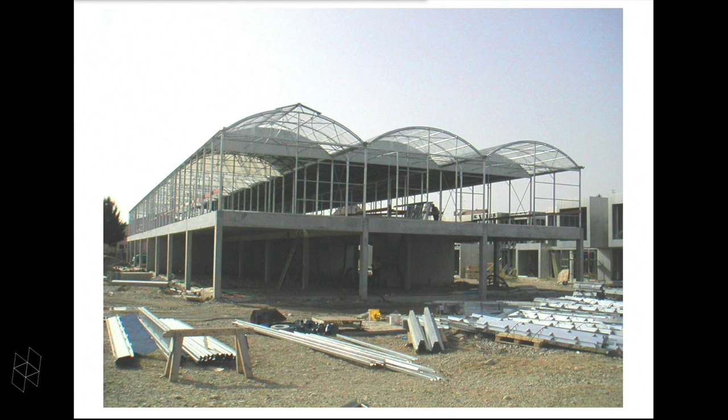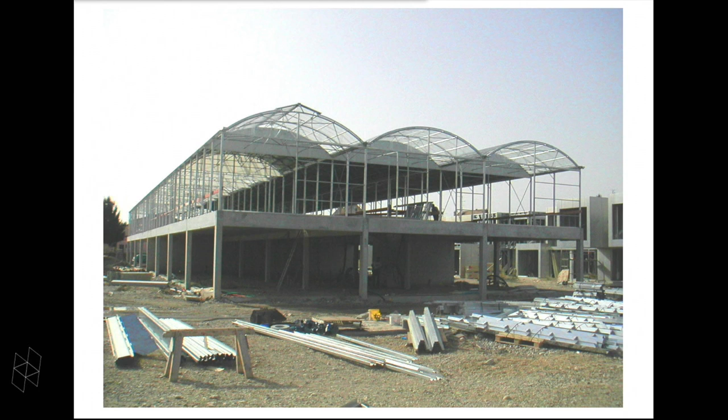It is possible just to superimpose two systems, two completely different systems. One is a very efficient structural system of concrete with columns, beams, and floors. On top of it, a professional horticultural greenhouse with all its equipment for creating climate. So capacity given by the concrete system, controlling the climate with the professional greenhouse system, and by combining the two, the possibility to create flats and apartments there.

With, here again, double space. Double space meaning the program of a house with 2 bedrooms, 1 living room, 1 bathroom, and 1 kitchen should not be restricted to this dimension, but should have more free space, in order to expand other possibilities: to invite friends, to have many other occupations, to allow for some surprises of life, and to let people expand their wishes and their character.

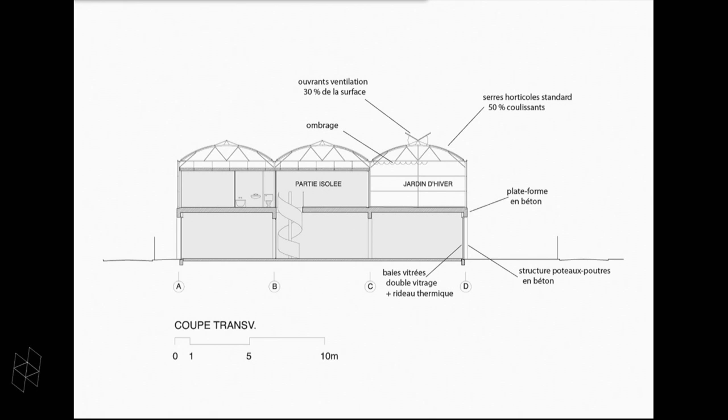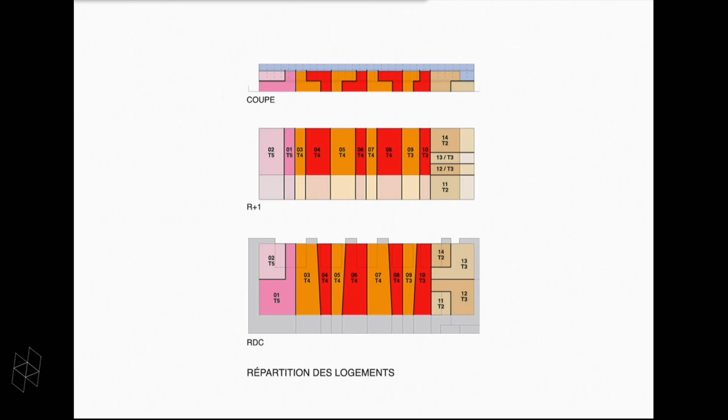So just this system allows these two places, and then you see how you can make a partition of it, giving each apartment access to the ground floor, the upper floor, and the facade, in order to produce, with the same budget as a flat of 80 square meters, a flat that is 180 square meters. And that gives these possibilities of life.

Different possibilities of use, perhaps placing in the winter gardens things that, as architects, we would never think would be there - but being confident with the user and the inhabitant to use this capacity.

Always this relation between inside and outside, this transparency, this possibility to filter, to reduce the light if you need, but all the time to have the maximum possible.

Double space, not only for housing, but housing is everywhere. Housing is here, housing is in the school, housing is in the city. Inhabiting is situations to be well in any place of the city. For us, it is this idea that today inhabiting becomes the most challenging objective for architects and urban planners in order to make the city comfortable and full of pleasures.

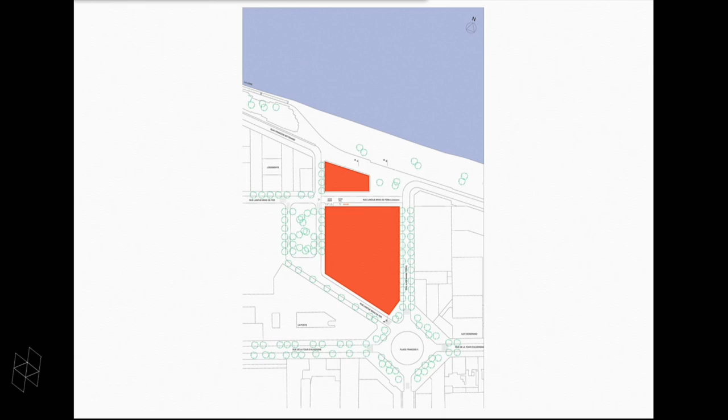So to take all the parcel, all the plot, to occupy all the plot. And then on this plot to install a system of very high capacity, perhaps like an old industrial building that could have been there on the harbor of Nantes before, but that is no more here.

So a system of a grid of 10 meters by 10 meters, supporting floors of a capacity of 1 ton per square meter. The first main floor is at 9 meters high, the second at 16 meters high, and the third, which is a roof, is at 23 meters high. All of them have this capacity of 1 ton per square meter.

And then a ramp, a large ramp of 8 meters wide, like a street, takes the people or the cars or the vehicles from the ground floor and takes them to 9 meters, 16 meters, and then 23 meters, giving access.

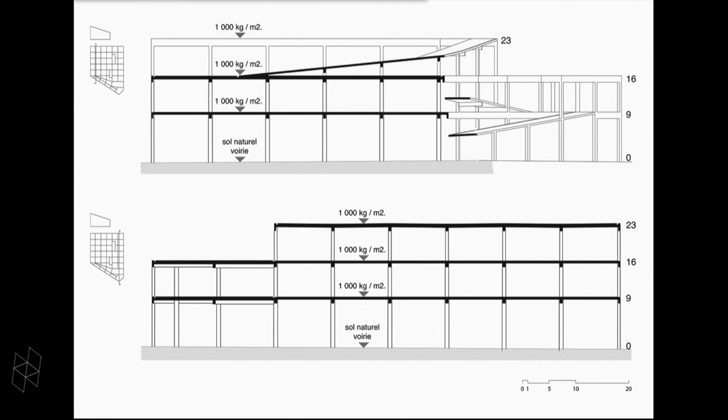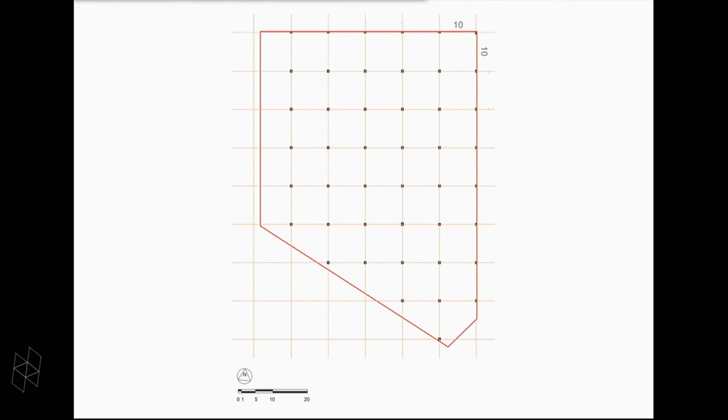The grid is the tool for the economy, the tool for efficiency, the tool for robustness. Some stairs and elevators, and the start of the ramp that develops from ground to the next levels, make a sort of promenade from the ground floor of the city of Nantes to a sort of terrace 23 meters higher.

Opening possibilities. All the floors in the School of Nantes make a total addition of 30,000 square meters when the program is 9,000 square meters. And the budget was about 9,000 square meters.

But the idea was to keep on the budget, to stay in the budget, and to propose these 30,000 square meters of capacity and possibilities for the school.

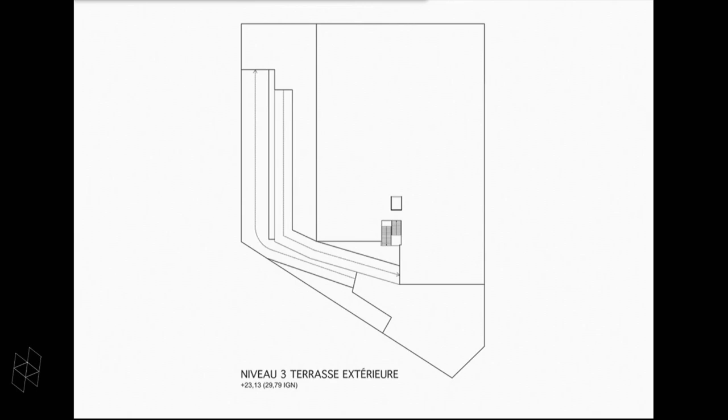So a sort of huge space with huge heights where there could have been a building before, in which the School of Architecture could install itself.

A skeleton made with the minimum of concrete, but at the same time with the maximum of robustness and the maximum of heights, in order to achieve the possibility for different programs to install in it.

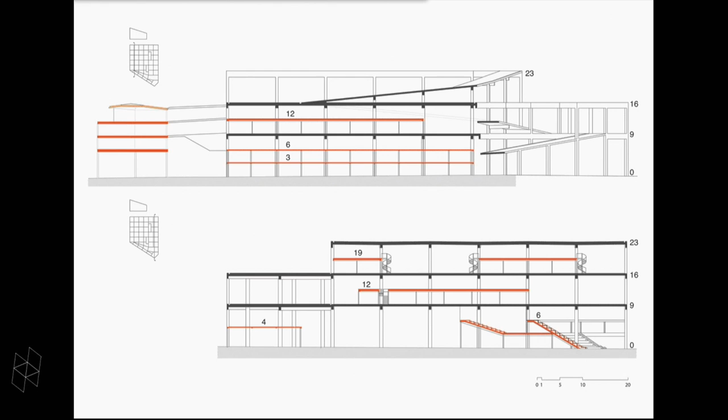So then, inside this main structure, a secondary structure takes its support from each of the main floors, allowing for mezzanines and amphitheaters, in order to install the program of the School of Architecture in this sort of loft, with places for mezzanines and different occupations depending on the levels.

And then inside the system, to think of different climates. You have a green climate, which is the climate of the program, something you have in all schools of the standard, with a regular temperature.

And the blue one is a sort of intermediate climate between the climate outside and the resulting climate in the green, also using the passive energy of the sun, which makes this space totally usable even if it is not at the right temperature all year. And to propose different capacities and different kinds of space and climate.

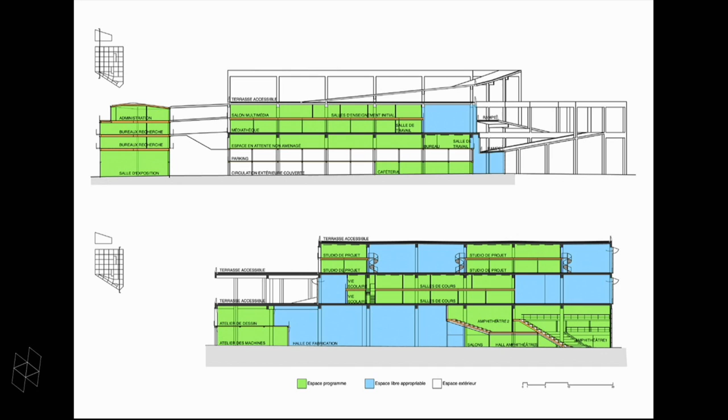Then, inside the system, the project develops, the ramps develop, organizing the connections with all the main situations. The auditorium opens to the street in order to have this interaction between inside and outside.

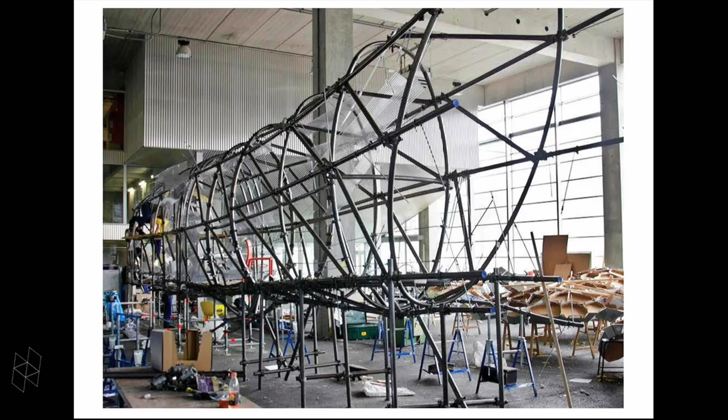The cafeteria occupies the ground floor. The 9 meter volume gives the possibility for making huge models for the students, always with this relation inside-outside, trying to open different possibilities: to have a concert, to have this auditorium open to the river and the outside for different presentations or theater elements.

Trying to work all the time with this porosity between what is inside and what is outside. But also giving the possibility of little meetings, where one professor can go to a corner, just at the view of the river and the city, and make a little speech with his students.

Giving the possibility to go where the sun is, or to use the additional space for performance and events.

Always this relation inside to outside with sliding doors opening to a little balcony. And this possibility of views to be in your studio working on the models, looking to some friends on the level below, and then further on the bridge and the river and the city. Transparency, visibility, porosity, mixing of climates, mixing of possibilities.

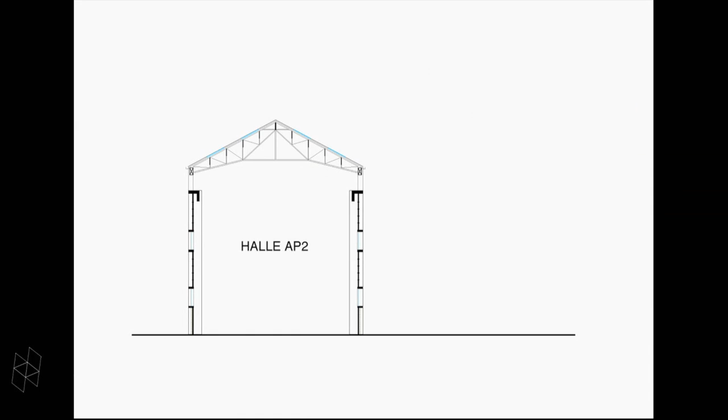And for us, it was strange to imagine a competition where people ask you to fill this with a new architecture, with new floors inside. So instead of working inside this big hall, we make a double building. We install exactly the same building just on the side of the first one, and we put the program on the new one, in order to keep the first one totally empty.

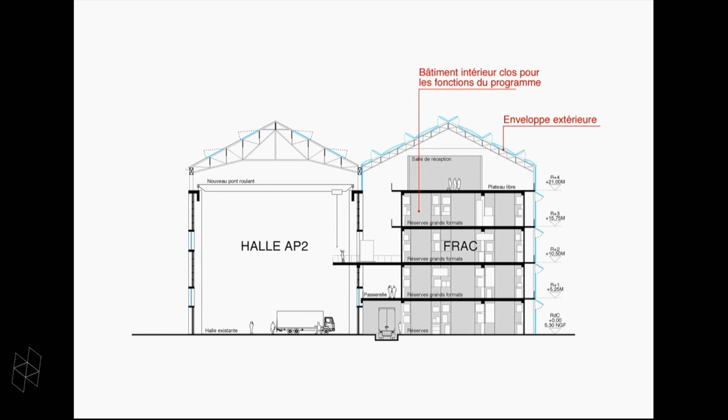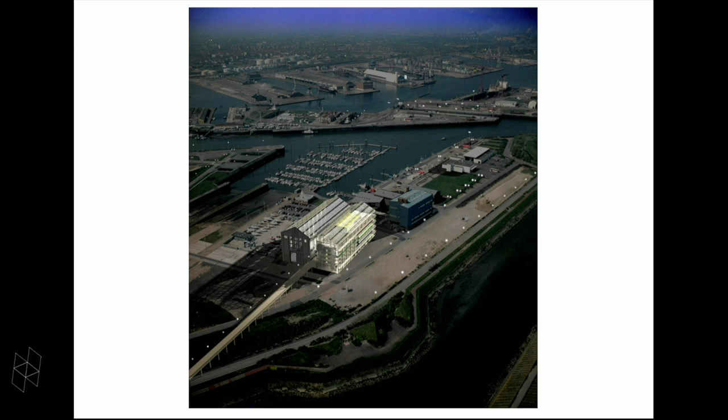With the new one, transparent, with the storage and the exhibition rooms, instead of filling the building, we say no, there is no nostalgia, there is no memory. The question is ambition. Ambition is to double and to have two times more possibilities.

It was more simple to work outside than inside. It was more economic to work outside than inside. And it offers two times more volume. And it keeps, I think, what is the most important, this inside space free as it is, with this real memory of what happened inside before.

So, building double in the same budget with this careful attention to economy in order to give more possibilities and more freedom. So now it's open, it's an art center with the use of the first original building, the cathedral, and new equipment like the entrance hall and the cafe, opening to the exhibition room in the new building.

A new building that is totally different, because the first one is quite opaque, this one is totally transparent and open to the sea around and to the harbor around. When from the first one you are surprised by this huge volume, here you have a system of stairs and elevators that makes you go very high in order to have the views and the panorama all around you.

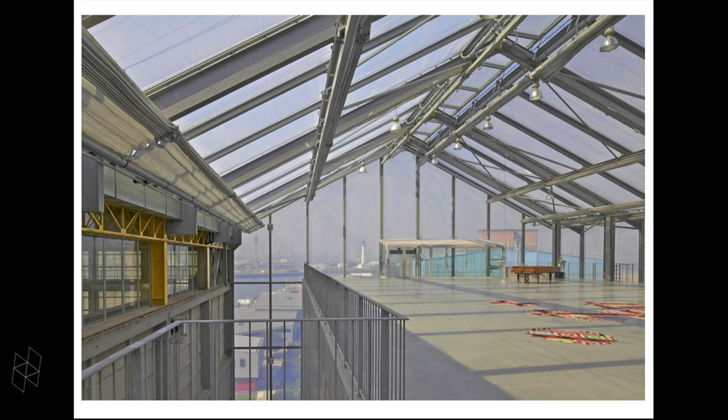So huge spaces with the collection of art, different possibilities to exhibit with always these views and balconies to the sea. Here the view on the Manche. Here's a view on the harbor. Views that you never had before, like looking from up to down to the first big building. Building double.

This seemed an interesting challenge for us, in order to give the program more freedom and no restriction. Another point Anne was talking about is precision, precision and delicacy, which connects with this African lesson that we had, to do with whatever in any circumstances.

When you are close to the sea, in a forest, on a parcel with plenty of beautiful pine trees, the question is whether a house is possible. It is possible to inhabit here, but to keep the site exactly as it is, meaning never cutting a tree, never taking away a root, and using the sand dune with the exact shape it has, being extremely precise to install a house that participates in this context.

Even the light - normally it should be dark to go under a house - but it is possible to use the reflection of the sun on the sea, so this reflection comes from down to up, reflecting on the aluminum of the ceiling and making this beautiful light underneath.

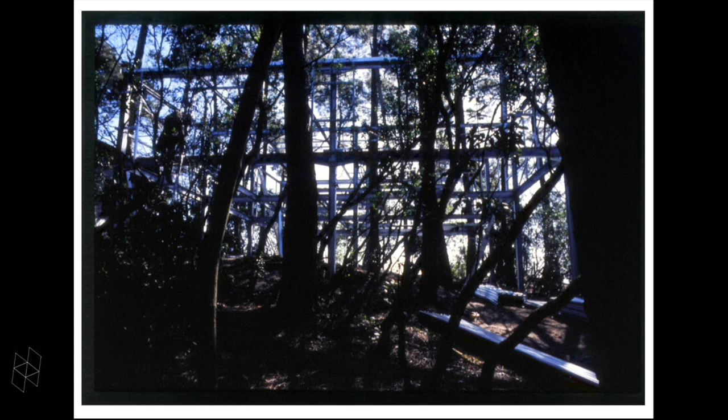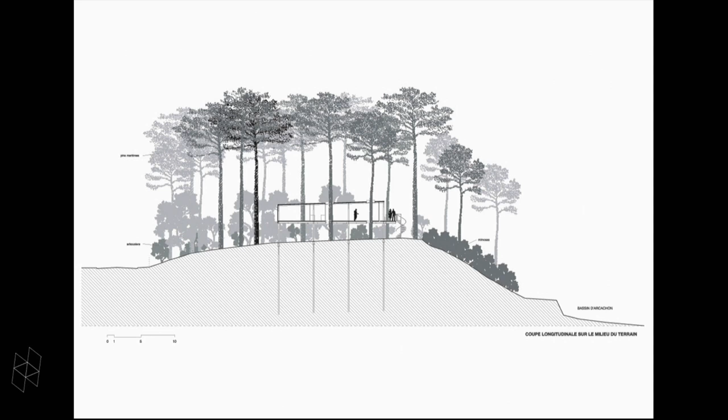So it's about thinking very precisely how to mix two systems: the existing systems of the trees, the forest, the roots that are particularly fragile, and a steel structure that could go inside to give the conditions to install a family here. With very precise foundations and a system of pilotis, the house is quite high over the sand dune, opening the view over the little bushes toward the sea.

So all the trees marked by the black dots are all still there - 50 at the beginning of the construction, 50 at the end. It was clear that if we said 'this one, we should cut it,' then the challenge was no more there, there was no more excitement to do the project. No, we had to keep all of them.

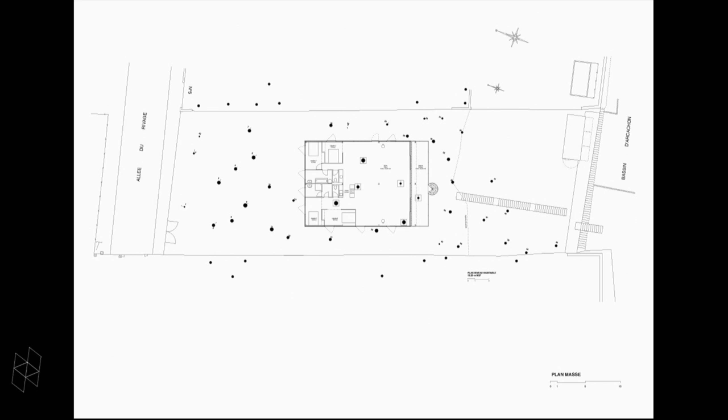Even this one that is in the passage between the toilets and the bathroom, and that is a bit too big - it's okay, we have to do with this. And to manage all the questions, like how it moves when there is wind, how it doesn't touch the structure, because it's so strong it could damage the house.

And finally, the main thing is to install a situation - to rest there in the shadow, close to the trees, to touch the trees in your house, and to have this view towards the Bassin d'Arcachon.

So, to do with the minimum. Here, the house was already there - it's like 80% is already there with the trees, the sand dunes, the panorama, the view, the landscape. As an architect you just have to add some elements of steel, some concrete, some transparent windows, and that's all. Doing with, and with the minimum, and this very precise, delicate attention to all that exists.

So this is the kind of project we're sometimes on today - like this, what they call an ecological cluster neighborhood. On this parcel, the question was whether it's possible to build 500 flats at the limit of this forest, a natural forest in the city of Saint-Nazaire that had been there all the time.

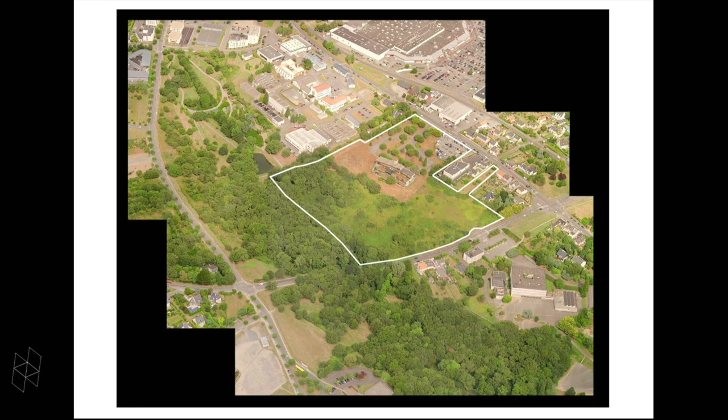It was clear that placing 500 flats there would destroy the site - how to protect the ground, how to protect the soil. So the first element of research we did was to study the forest, its different areas, different qualities, different parts, different density of forest, to see what kind of site we had.

And to see the danger of building there. We even found a whole building that the client didn't even know was still there - an old office building that we found very interesting.

And immediately we said we should not demolish it. We wrote to the mayor in order to keep it, and he said no, it's too late - even though it was delivering some beautiful views on this situation.

So the question was, like in the first project, to see how it was possible to raise over - to make this building on very long pilotis, with a passerelle at 9 meters high from the ground, and then the first flat 3 meters higher at 12 meters high from the ground, on three levels, with stairs coming from the pedestrian way to distribute the system.

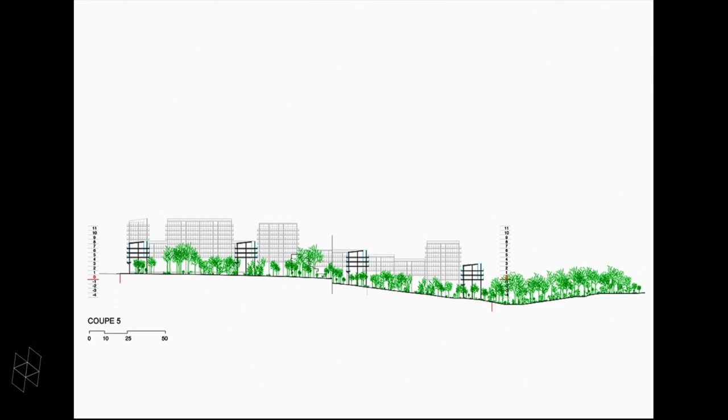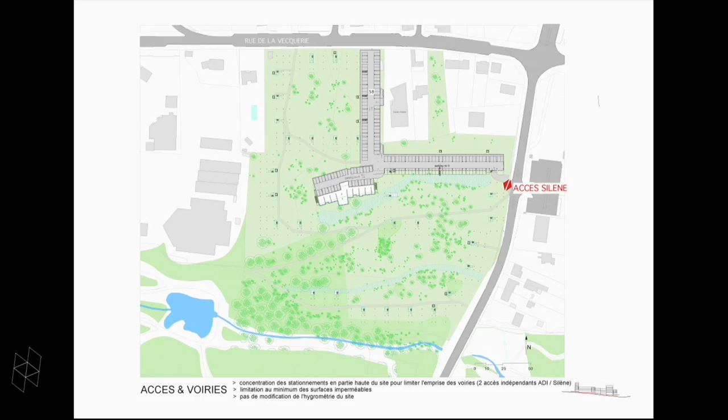So we don't see the pilotis and the stairs nearly, but there's minimum impact on the ground, then the passerelle of distribution at 9 meters high, and then the flats at levels 12, 15, and 18 meters.

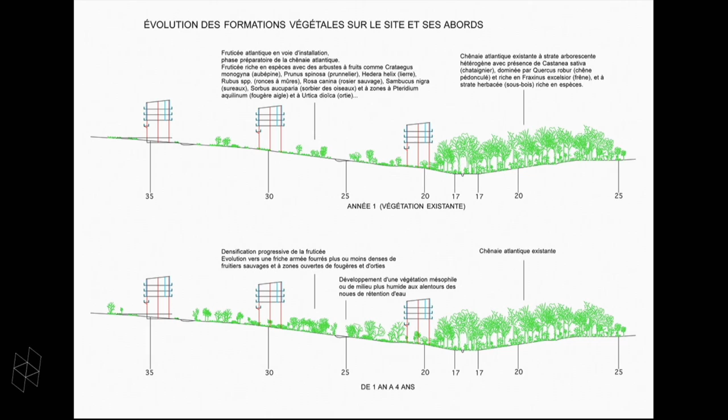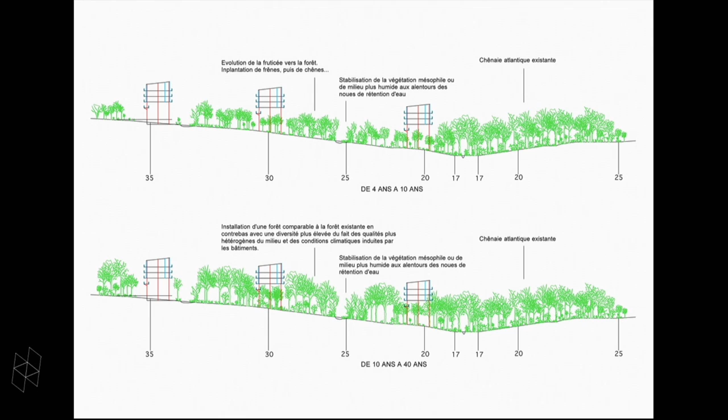And then, year after year, this possibility for the trees to recover the situation and to install vegetation even under the buildings. So we can see here from 4 years to 10 years, and then from 10 years to 40 years, the forest could take the place again in direction of the city.

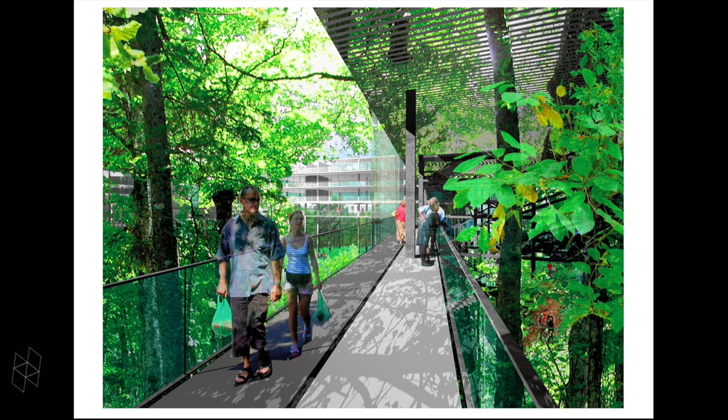So the pathways are only pedestrian. We use this transparency and this reflection on the materials, and we try to work a maximum with the light in order to push the vegetation.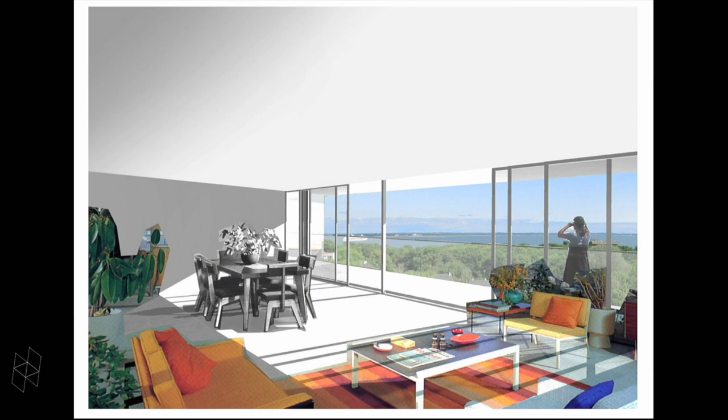And at the same time, installing some flats in a fantastic situation. So here the challenge is this: to propose a system, but at the same time to propose a participation for the inhabitants to something that is just below where they are living. They can be responsible for the re-attractivity of a territory, or they can be responsible in terms of inhabitants for the recovery of the forest in an urban area, and how they can participate in this challenge.

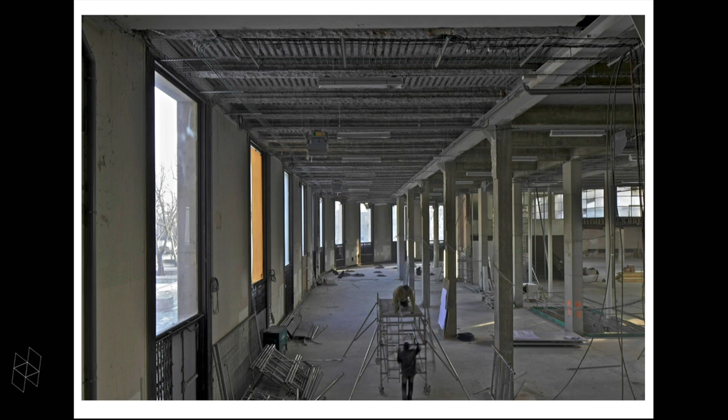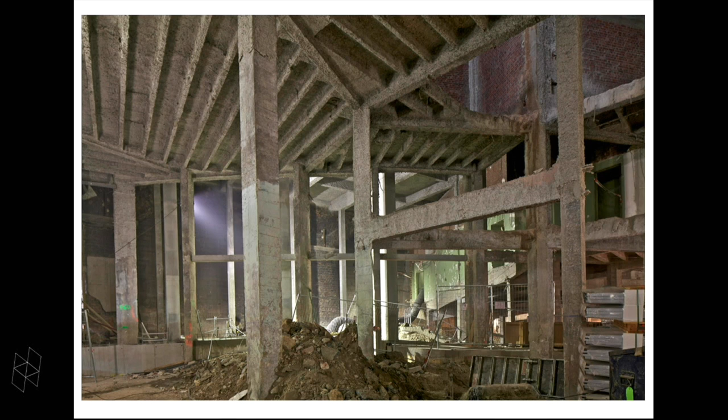Or to do nearly nothing, like this big Palais de Tokyo in Paris, where the structure was empty because of a former demolition project inside that never happened, and this building stayed empty for 2 or 3 years. We wanted to see how it was possible to make the life again, to make the space free again, and to install a contemporary art center in it, with a minimum budget, taking advantage of the quality and the extreme strange character of these spaces in order to fulfill the wishes of artists and visitors.

So, nearly nothing, just giving the minimum for heating, for lighting, leaving the spaces like they are, just working on the solidity in order to repair the building with a minimum budget, and stop.

No. I have a block. Is it okay? It stops, so I don't know what happens.

Yeah, it's come back. So to see in this incredible space how immediately plenty of artists organize different art pieces, freedom again for visitors. This Palais de Tokyo has been open since 2002, and each year 800,000 visitors come to explore the building.

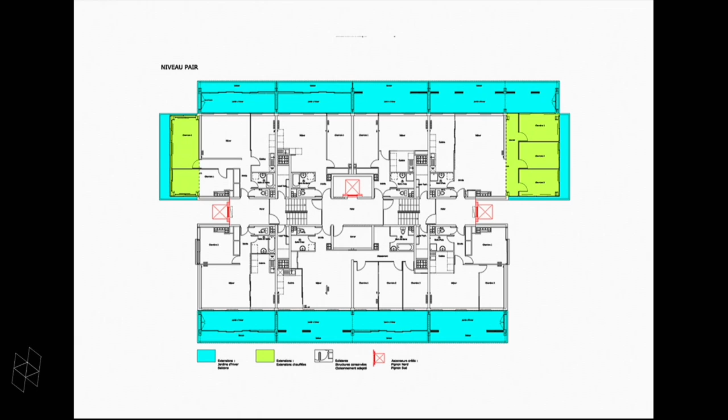It's in that way that we transformed the Tour Bois-le-Prêtre in Paris. That was a building built in the 60s, unfortunately damaged in the 80s with these asbestos panels of beautiful pink and red, with fewer windows than before. We worked on an extension with new rooms and new winter gardens, new elevators, in order, instead of demolishing, to add and propose new possibilities.

So instead of that view, to have new winter gardens in addition, and then all this transformation from inside inevitably changes the aspect and the view from outside. People stayed during the works, all of them, and just gained this extension of their flat.

In the same principle, another city close to Saint-Nazaire, in La Chênaie, these very characteristic blocks around the cities in France, and always this question: should we demolish or should we keep? Here we have a little tower with 10 levels and 40 flats, and we looked at the possibility to extend.

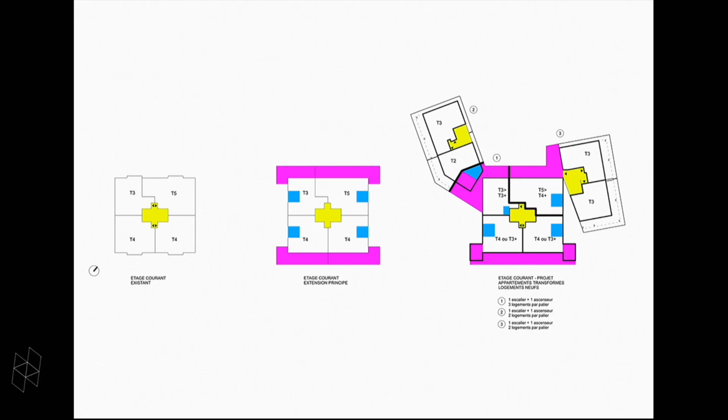We went from this situation to this situation, to have new bathrooms here that were here before and bring them here, to have new balconies and winter gardens for all 4 flats at each level. At the same time, thinking about density, it's possible to add 40 new flats in 2 wings, using the hall to distribute some flats here also with particular entrances.

So we see how by addition, instead of demolition, we can change the situation. Densification, in order to give more place for each, each has a much bigger flat. The budget is much lower than the budget of demolition and reconstruction. And at the same time, more densification, more population, makes possible some new shops, new equipment, new services on the territory.

At the same time, this same kind of situation with winter gardens saves energy in a different way than triple glass - it's better if you can have some life between two glass layers. Always balconies, filters, the possibility for the inhabitant to characterize his climate and ambience with curtains, with the winter garden movement, and these views on the landscape and territory.

Today, I'll present this project very quickly, but it works because we worked on this element, this building, and this little building. It is 530 flats, all occupied - there is only 1 or 2% unoccupancy.

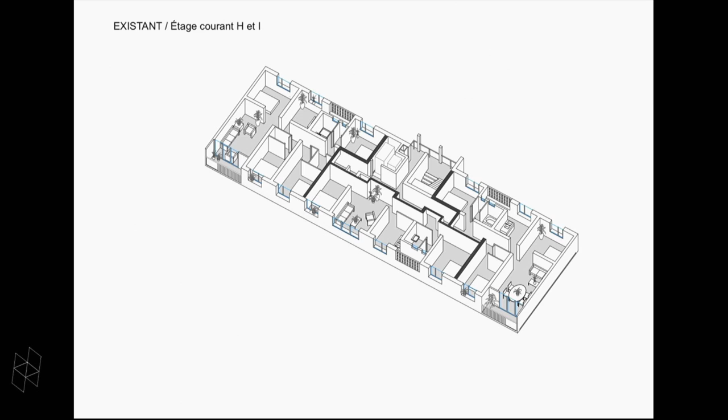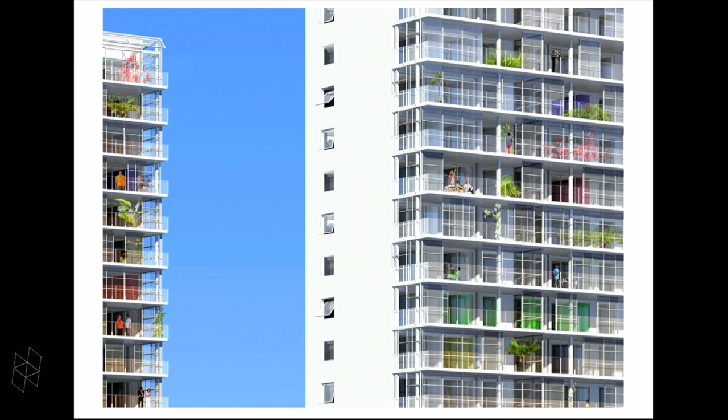From this window to give this possibility. From this kitchen to open, to go outside. And then from this situation, for each flat, to give this possibility.

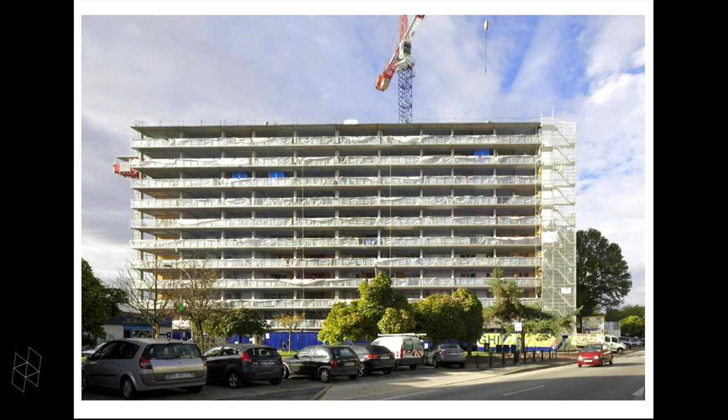So then very quickly, the story. Here you see the first elements of foundations. Then the elements come, already prefabricated, with all the elements for the rails, for the balcony also already there. And then the change progressively - 8 elements by day, so this can go quite fast.

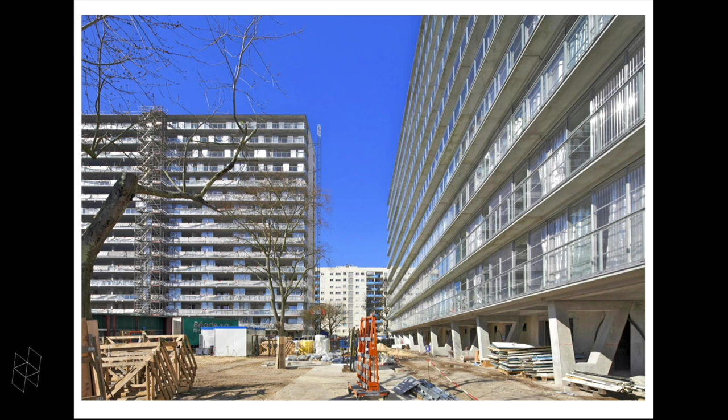So a lot of work still, but already this is done - we have already this. And we change this very flat facade in order to give this extension to outside, to extend the program - it's not only living room, bedrooms, bathroom, no, it's also additional space, like a garden. So at the end, the challenge is that we should have no more flats, we should have only villas everywhere.

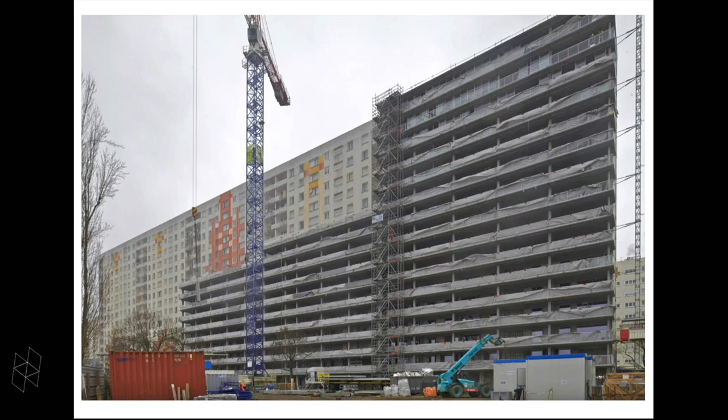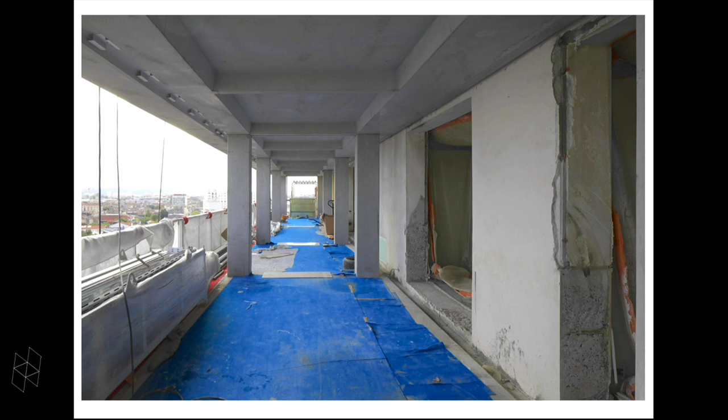So you can see here the system and the process with these prefabricated elements that have their definitive balcony. Then they open under the windows, they cut under the windows - you see here - and then they place the new windows.

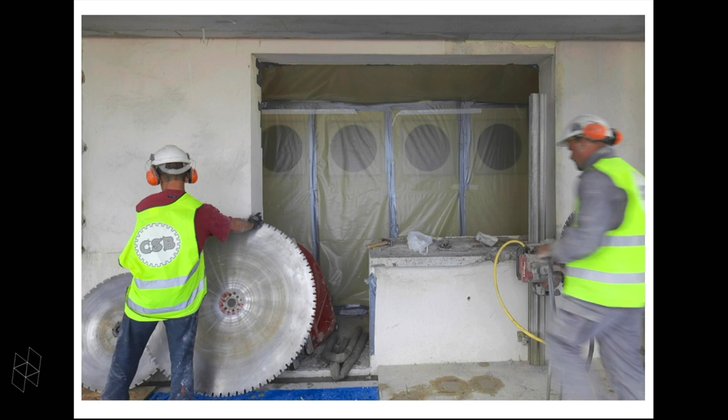And this situation - then we have also some asbestos to protect, so people can stay inside, and we have this protection in order to avoid pollution. With the elements to cut the walls, take them away, then open again, place the window, and open to the winter garden.

In Mulhouse, another project, social housing, with this same generosity of space, with this same careful attention to the economy, the budget, with the challenge of generosity of space.

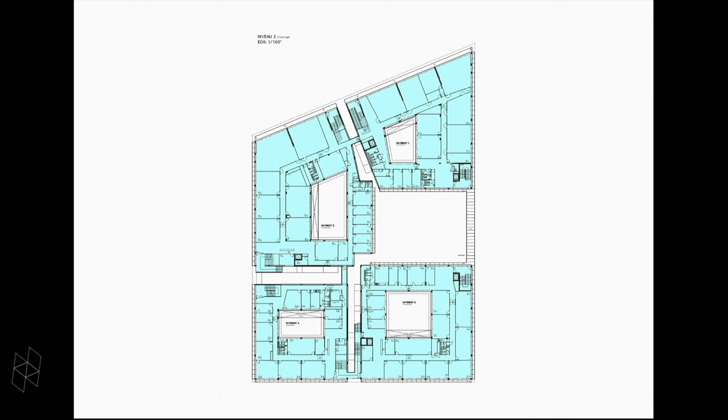Or in Bordeaux, it is just a very universitary building for management, so nothing really funny inside. So we wanted to add something on each facade, on the 5 levels, at each balcony, to create a sort of garden of rose trees - 650 climbing rose trees, with different names, all around this facade, to create a vertical garden full of flowers.

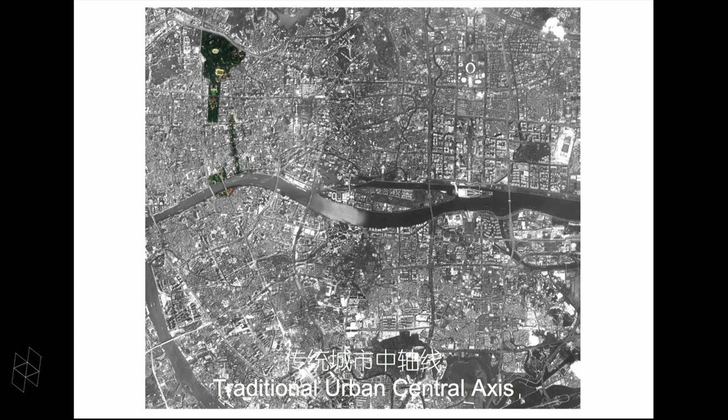Or sometimes, like this last competition in Guangzhou, for the Museum of the City of Guangzhou. The original museum is like this, a system of platforms. The reference is to the symbolic foundation of the city of Guangzhou: 5 goats that came when the city was a desert, and when the goats came, they spread seeds everywhere, and the city became extremely luxuriant.

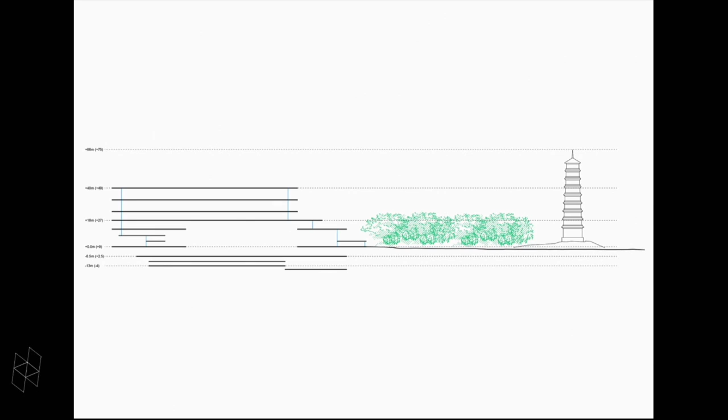So a new plan to make a project of museum inside this context, with this pagoda and this beautiful garden in this context of strange buildings, on this parcel here, to work on this situation. And there, also to install, like in Nantes, a very simple and efficient building, a sort of reference to the National Gallery of Mies van der Rohe in Berlin, a stratification of levels up to 40 meters high, keeping the forest and the pagoda, installing the building totally on the back in order to keep the trees free.

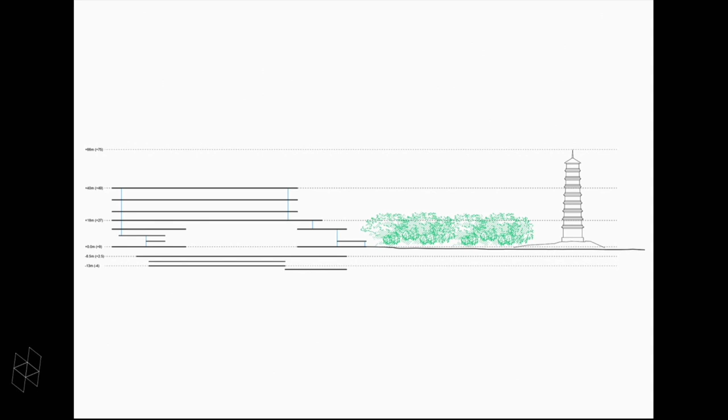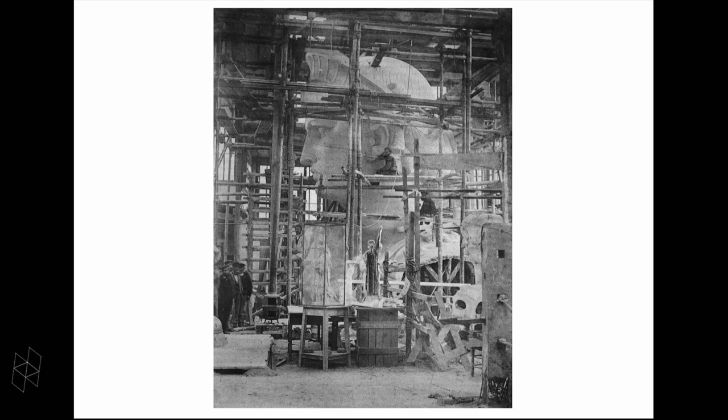Offering different views to the space, and also thinking that something should be inside the building, like this reference to the Statue of Liberty in the atelier of Bartholdi in Paris, to say that today the statue should not be on top but should be inside, making the combination of these two systems: the extremely clear and poor architecture of layers, plus this figure inside that inhabits the building - these 5 goats, symbolic, coming inside.

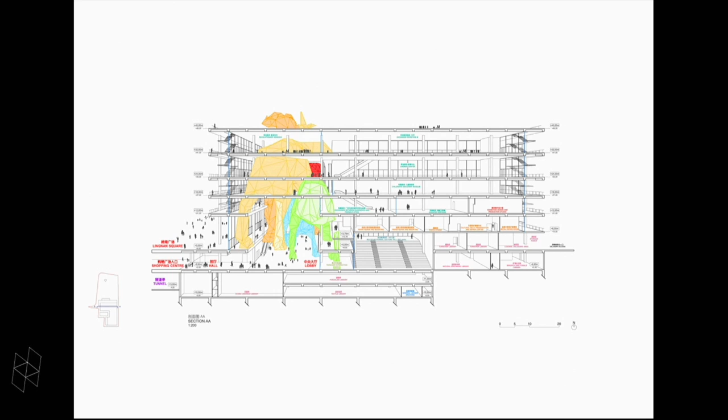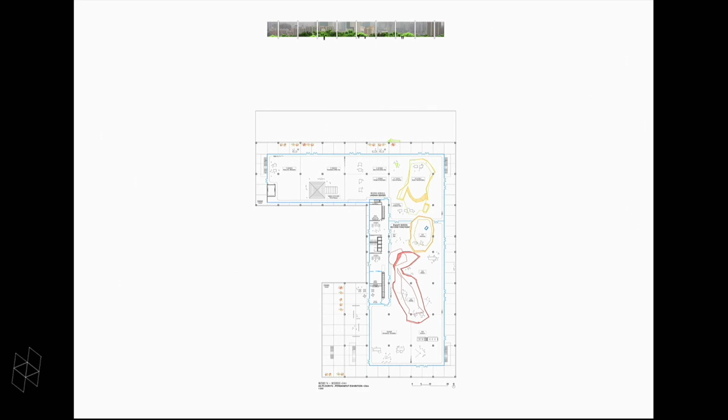There is not a building that refers to goats or to a special shape. No, it's a very, very clear building referencing modern architecture, plus a statue inside - a statue that you can touch, a statue that you can go inside, a statue that will define different partitions of rooms, of spaces inside at different levels, and that will separate the different functions, like a giant inhabitant, up to the roof where just the head appears.

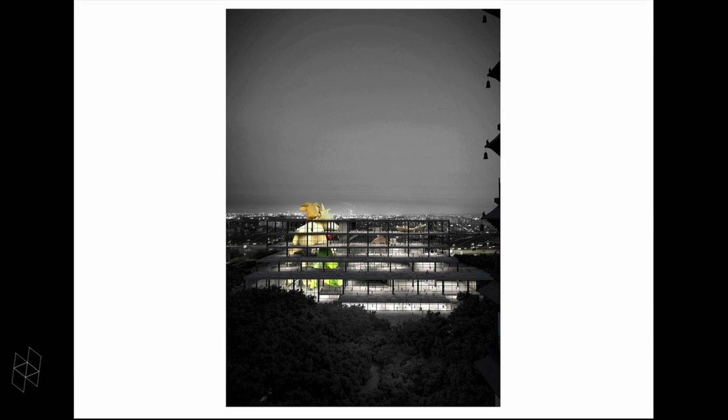And last project, actually in Dakar, the reference to modern architecture, because we really believe in modern architecture. We really believe in modernity. We really believe in this architecture made in the 50s, 60s in Dakar, Alger, Buenos Aires, made of generosity, large balconies that we can see here.

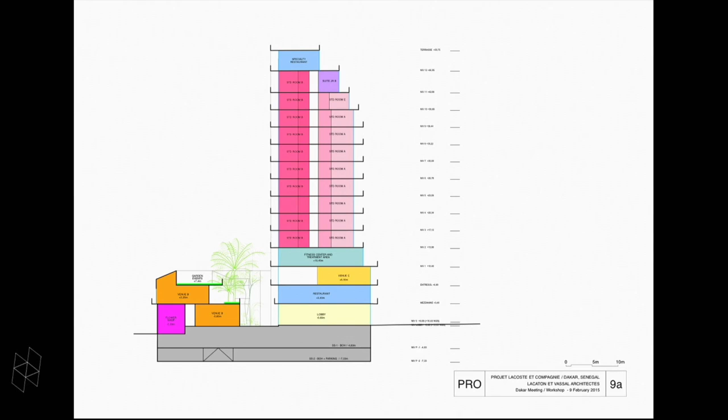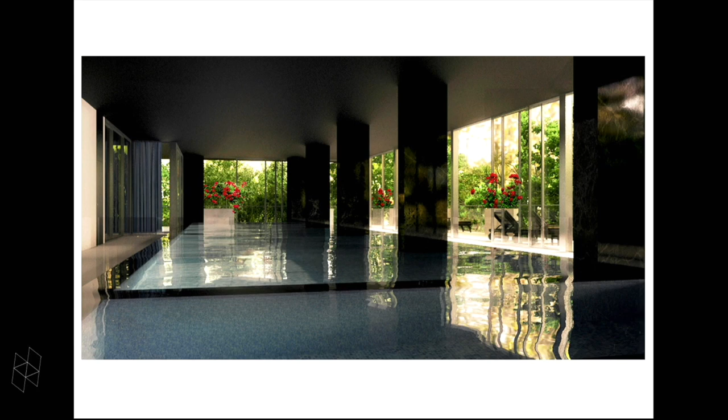Here in this place, near the market, a project of hotel of 15 levels, where you can see some virtual images of the entrance hall, the restaurant, the swimming pool, the rooms, and now the construction, with the views on the city, on the sea. It's just now in construction and should be open in 10 months, hopefully.

So we have shown everything, perhaps too many things, probably, sorry. But it is how we start from this little hut in Africa and how we try to keep the way and the direction, with the same challenges, with the same ambition, and we try with the same generosity. Thank you.

Thank you. Thank you.

Well, we have some minutes for questions, so let me begin with a resume. I've noted the words you both emphasized: freedom of use, kindness, case by case, never demolishing, generosity, living well, simple luxury, simple things, cheap is more, capacity concrete, control climate with the winter garden, housing is everywhere, doing with the minimum, densification, economy of budget, and a belief in modernist architecture.